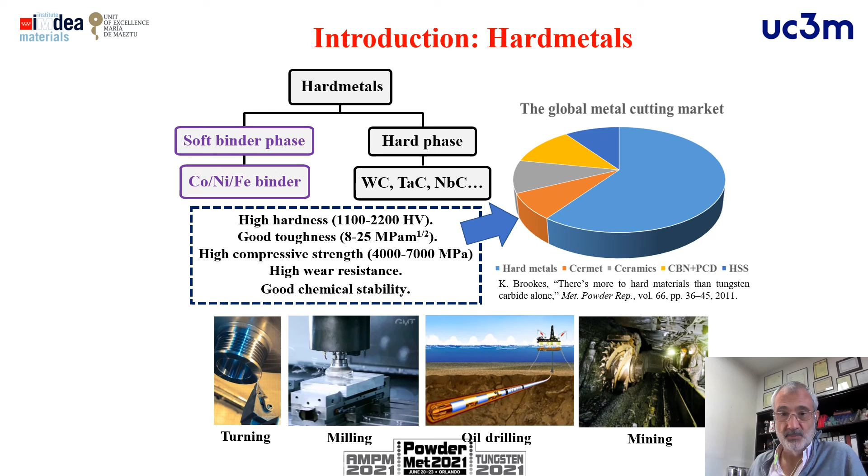This work is focused on the replacement of cobalt in conventional hard metals, cemented carbides, that usually use cobalt binder and tungsten carbide and other carbides as reinforcement. The market for these hard materials is really high, representing a high percentage of total consumption in the global metal cutting market.

Cobalt today is considered, since 2020, by the European Union as a critical material, both in terms of price and availability. This can be seen in a European Commission study that was published last year.

So it could be interesting to replace cobalt, but the problem is that cobalt is the best binder for cemented carbides due to its good combination with tungsten carbide during sintering.

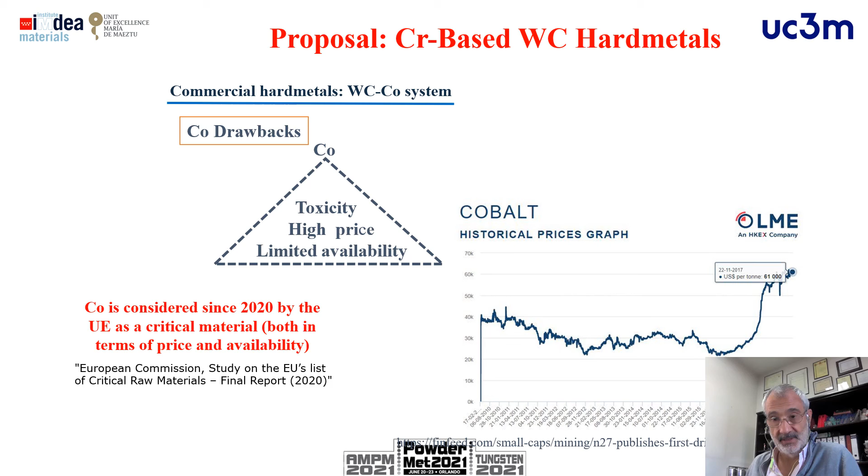So in our case, we want to design a novel tungsten carbide chromium-based metal without cobalt or nickel, which also has problems of toxicity and price. The idea is to replace conventional tungsten carbide cobalt hard metals in some specific applications, not of course in all applications.

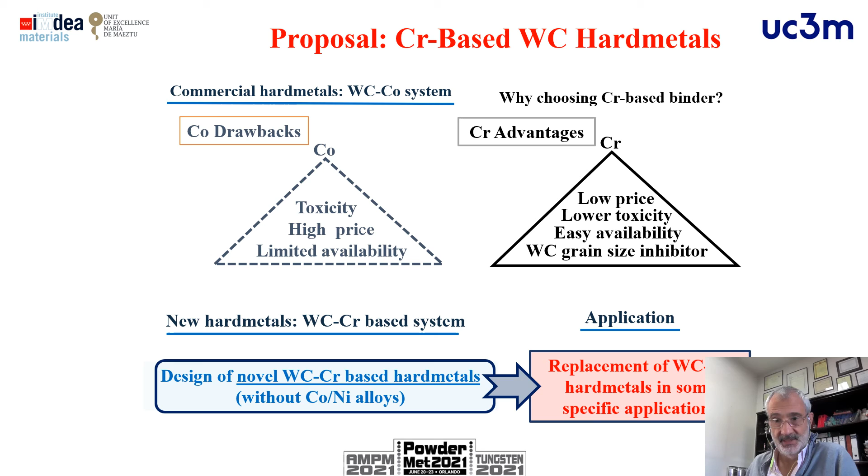The problem is that with temperature, the tungsten carbide grain size increases strongly. So we have to produce these nanostructured hard metals, which is a technological challenge, because the rapid growth of tungsten carbide grains with temperature prevents maintaining hard metals in the so-called nanosize hard metal group.

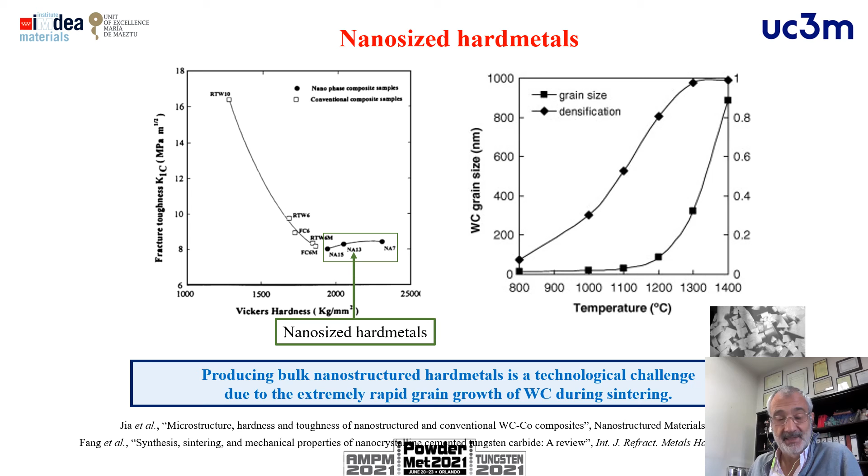For this reason, it could be interesting to use sintering techniques that avoid grain growth during sintering. So in our case, we want to design these nanostructured chromium-based hard metals with good performance and low cost, in which we replace cobalt with chromium or iron.

Chromium and iron have lower price, less toxicity, and are more available in the market, and could act as a tungsten carbide grain size inhibitor, which will contribute to not losing so much fracture toughness.

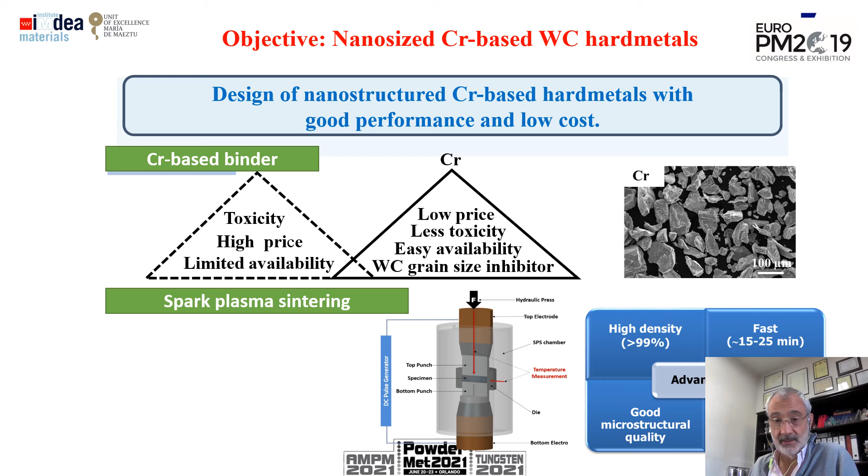In that sense, despite also testing materials with liquid phase sintering, we propose to use spark plasma sintering as a technology to consolidate these hard metals, because with this technology we can reach high levels of density in a very fast sinter cycle with good microstructural quality, stability, and good mechanical properties.

So the methodology is to design the composition using this chromium-iron binder, but through thermodynamical simulation we decided to introduce iron, because iron can reduce some negative effects and can improve the densification of these cemented carbides.

Also carbon is added in some specific amounts in order to reduce the formation of negative phases that can be produced during the sintering process. So this combination of iron and carbon will be in some way predicted by thermodynamical calculations and mathematical simulations.

Then we will develop the bulk materials by spark plasma sintering, and we will analyze the microstructure and the properties. In this case, we will see the hardness, the fracture toughness, and we have some results also regarding the wear resistance and the oxidation resistance of these new hard metals.

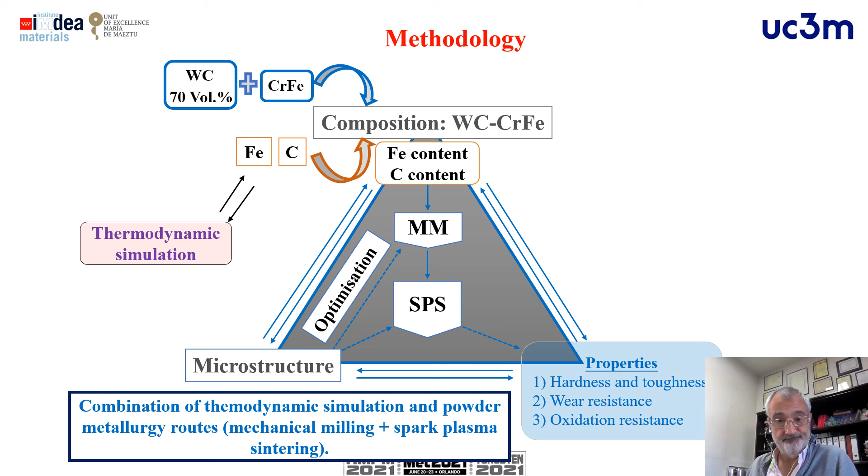The starting powders we used are two different families of powders, of cemented carbides of small size. Here you have the particle size distribution of this tungsten carbide, and we also used chromium iron powders, with a percentage of 71.4 chromium, iron as balance. In this case, this powder was supplied by Höganäs in Sweden.

The chromium iron powders are more irregular than the tungsten carbide, which is more spherical, and due to the small size of these particles, they tend to be agglomerated.

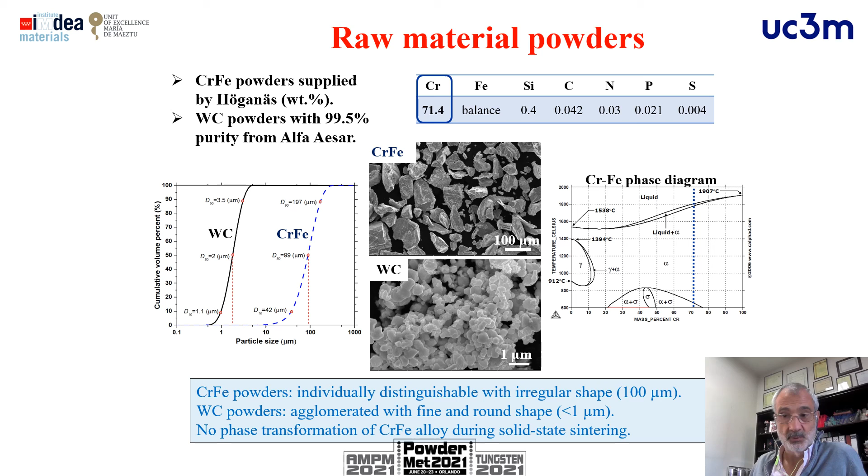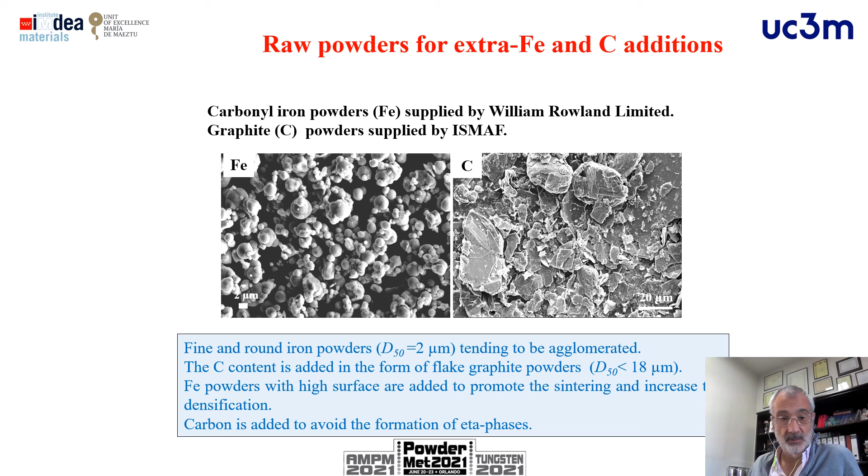As for carbon and extra iron powders, the iron powder we used is carbonyl iron powder, supplied by William Rowland Limited. This is a quite fine powder, very small size, and this will contribute to increasing the sintering behavior. The carbon is natural carbon, added in principle to avoid the formation of eta phases, and is also a conventional carbon used in conventional powder metallurgy.

So the first step is to integrate the carbon and the iron chromium binder with the tungsten carbide powders, and we did it by mechanical milling.

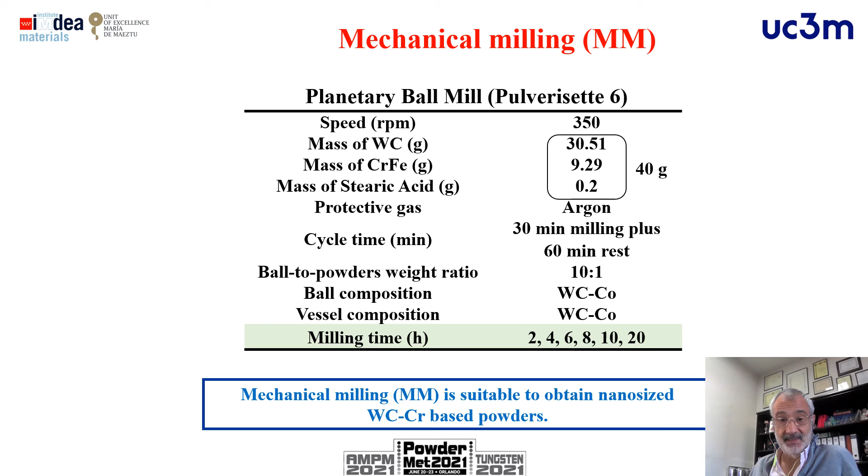In the next slide, we can see the evolution of the morphology of the powders through the milling time, and at the end we have selected the 20 hours milling time in order to have these rounded powders for the consolidation process.

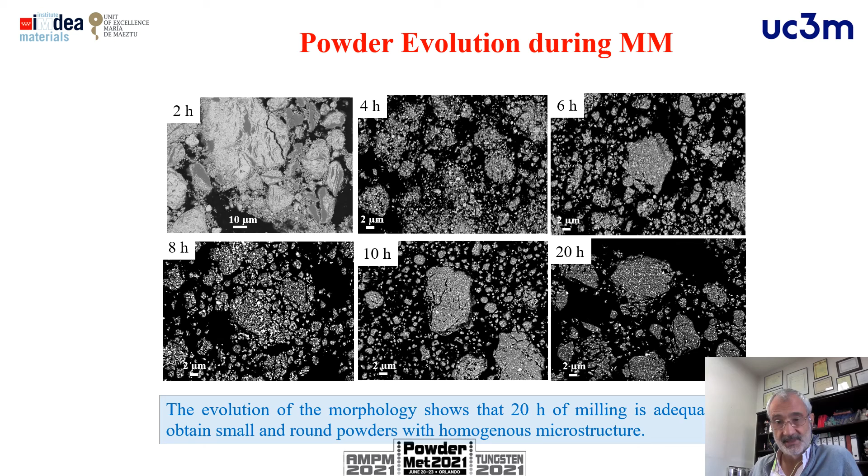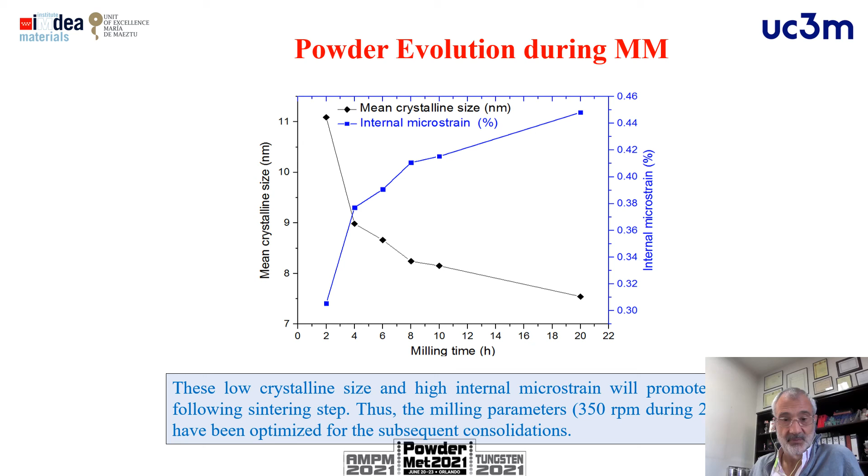So with the mechanical milling, we usually have this effect that we increase the internal microstrain and we reduce strongly the crystalline size. Reaching this small crystalline size, we can expect to have at the end this so-called nano size cemented carbides that we are looking for in order to not reduce too much the fracture toughness while increasing the hardness.

We have prepared some bulk materials through liquid phase sintering with these conditions. We heated it up till 1450 degrees for 30 minutes and furnace cooling in argon atmosphere. We selected this temperature because it's about 100 degrees above the eutectic temperature of the tungsten carbon chromium system.

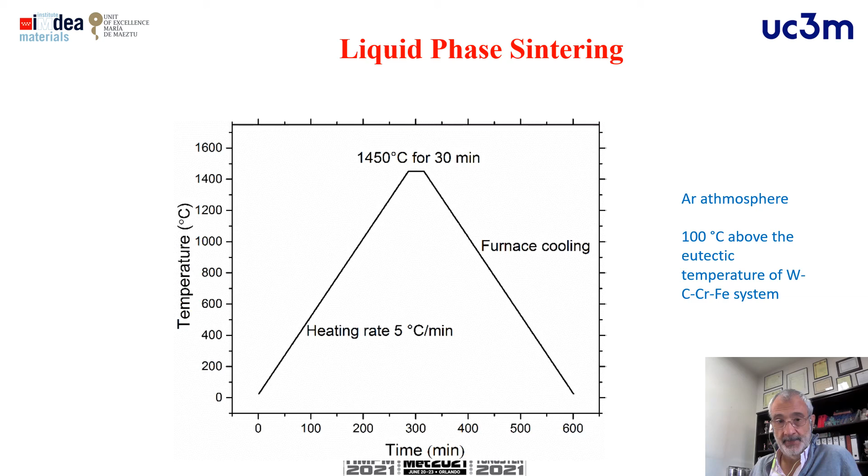These materials reach a relative density near to 96% in the case of some iron additions, but as I mentioned before, we have combined iron additions and carbon additions in order to increase the sinterability of these cemented carbides.

As you can see here, using in the order of 3% of iron and 0.5% of carbon, we can reach the lowest average tungsten carbide grain size in the final bulk material with good levels of relative density.

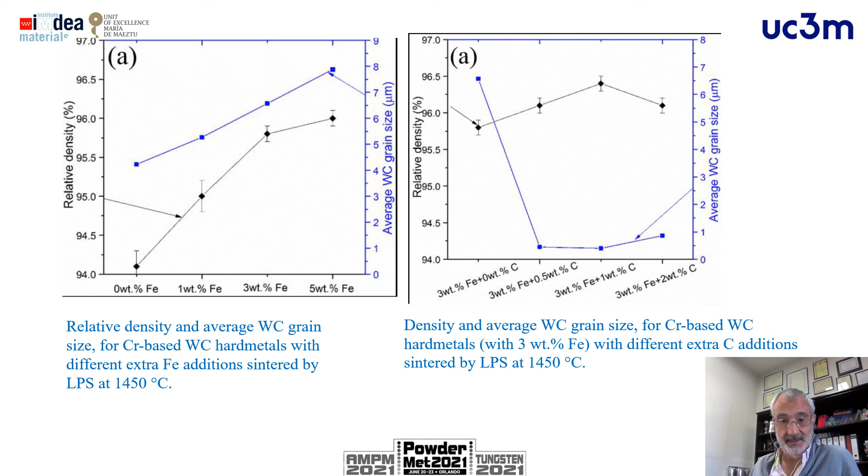Later we will analyze a little bit better the microstructure, but also the hardness that we can reach adding these amounts of iron in combination with some amounts of carbon.

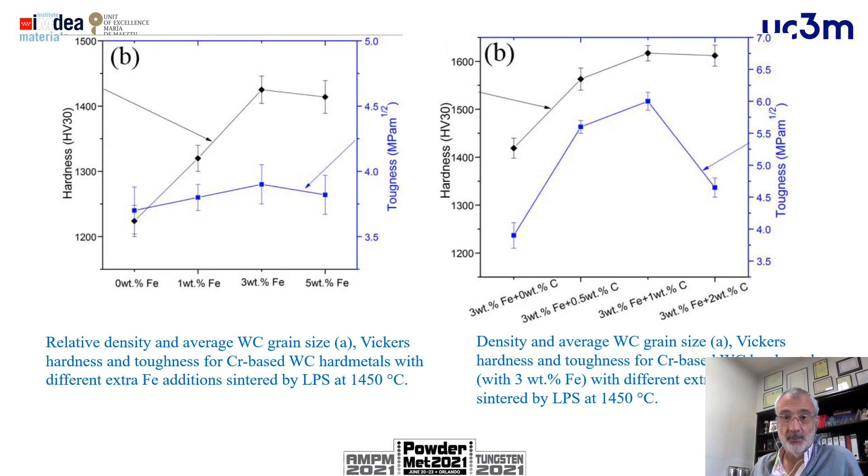You can see here with this combination of 3% of iron and 0.5% of carbon we can reach good levels of toughness, but not so high if we compare later with other materials obtained by spark plasma sintering. But the highest levels are with these amounts of carbon, also reaching good levels of hardness.

Here we can see the spark plasma sintering method. Here we have the typical force temperature time diagram, and with the field assisted sintering, we use much lower sintering temperature than the conventional sintering. So in principle, this will avoid the grain growth of the tungsten carbide.

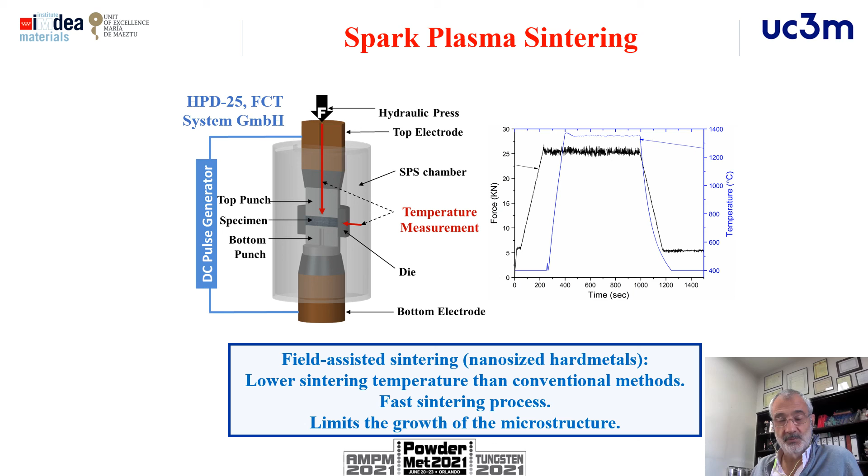It's a fast sintering process. We can, in this way, obtain a much better microstructure, looking for a good final fracture toughness combined with good hardness. We have tested many spark plasma sintering conditions.

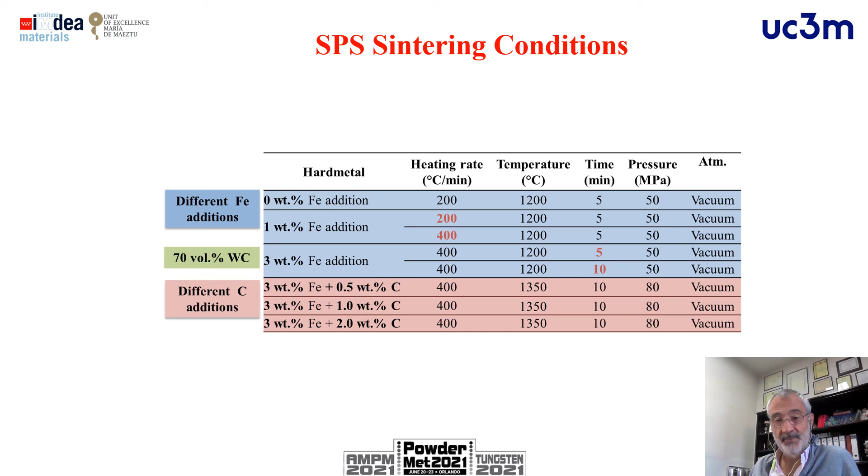As you see here, we have changed the heating rates. We can even test different temperatures, 1200 or 1350 centigrade degrees, and different times and different pressures.

At the end, we have selected for our best combination of material the 3% of iron with 0.5, 1 or 2% of carbon, the highest temperature, the heating rate of 400 degrees per minute, for a holding time of 10 minutes and a pressure of 80 megapascals.

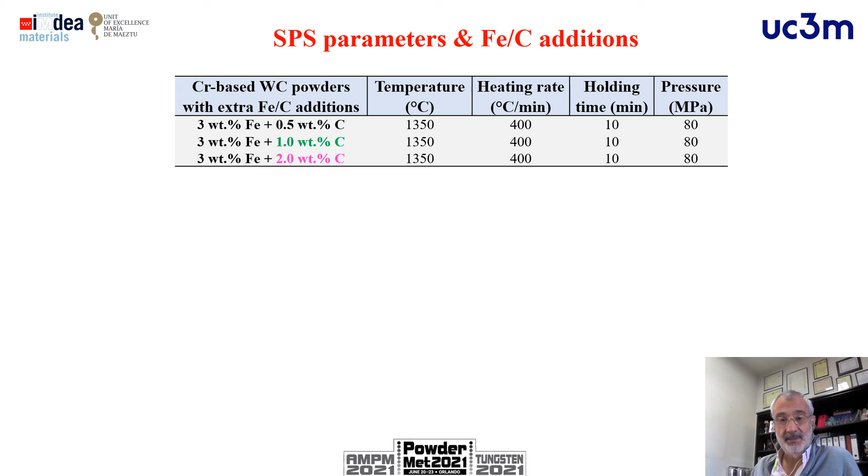This holding time with this high heating rate allows us to get a good densification. As you see here, the best densification was obtained with the value of 3% of iron and 0.5% of carbon.

This is the graph with the black line here. The pink one is regarding the 2% of carbon, and this one is regarding the 1% of carbon. So the best combination of elements, iron and carbon, is 3% of iron, 0.5% of carbon, reaching the highest level of density.

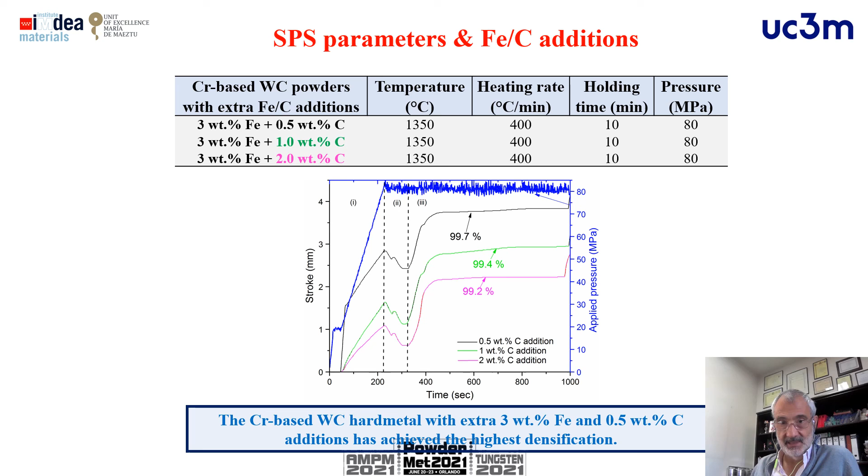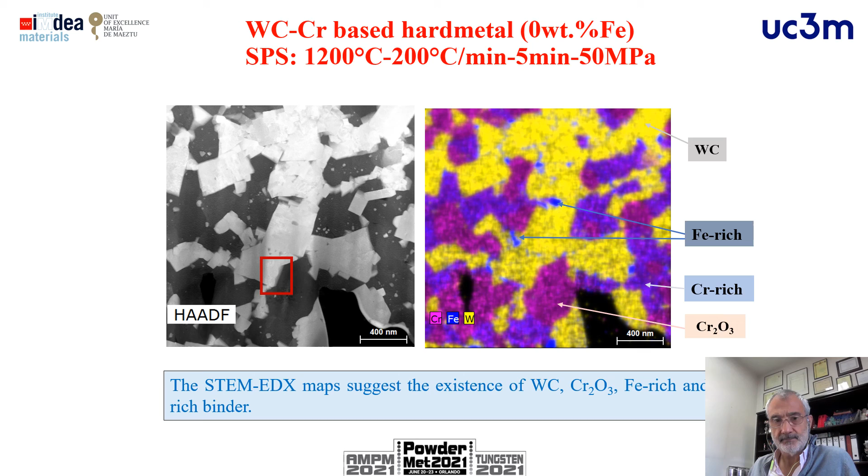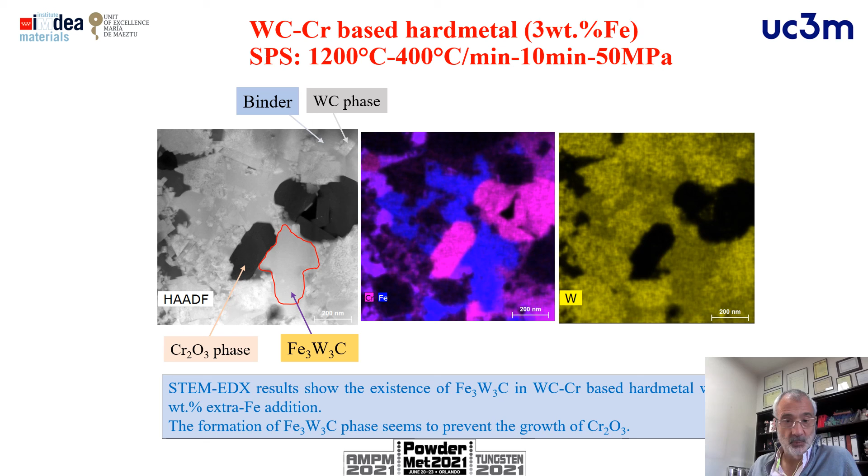So if we introduce iron, we have the presence not only of the chromium oxide, but also the formation of this iron tungsten carbide that in some way is better than the eta phase, because this carbide prevents the growing of the chromium oxide and allows reaching good levels of toughness.

So it could be a good idea to try to combine the carbon with these high levels of iron. So we have selected 3% of iron, and we mix with this 3% of iron different contents of carbon that we will analyze later.

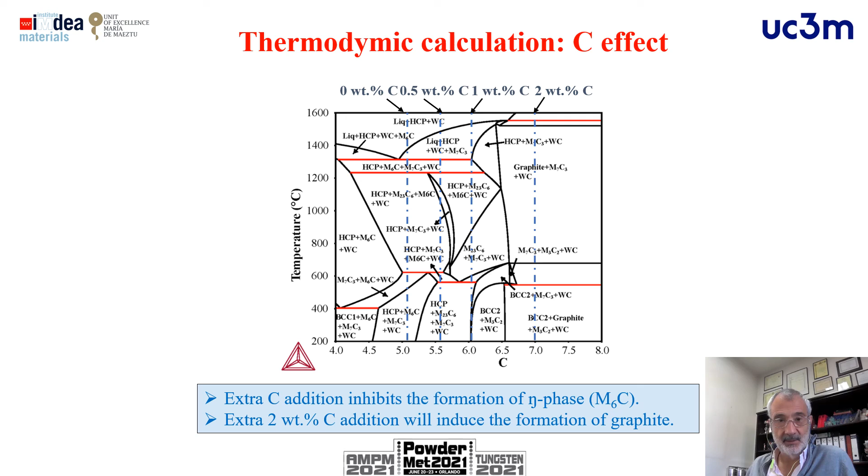Previously, we tried to see what happens in terms of possible carbide formation with addition of carbon to the tungsten carbide. We tested different amounts of carbon between 0.5% and 2%, but the highest levels of carbon addition can produce graphite formation, which is not a good idea for the final properties. So we will see that the best combinations are near 0.5% carbon additions.

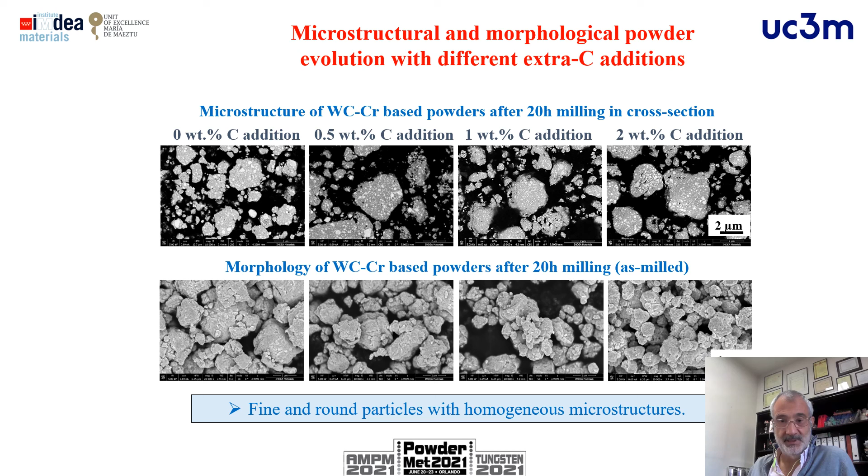Here we have the evolution of the mechanical milling. At the end, after 20 hours of milling, we got these rounded particles.

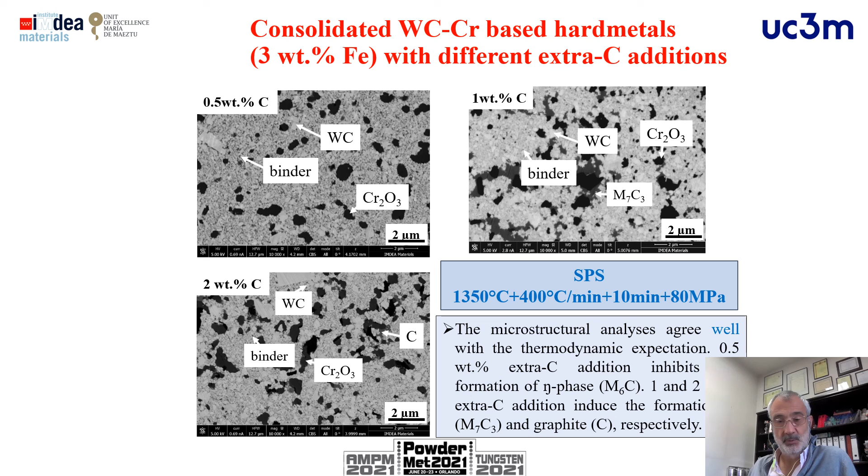The microstructure with different carbon additions also presents some levels of chromium oxide, but as we increase the amount of carbon, we can also get carbides which are not desired due to the brittleness they introduce. Here we have more detail on what happens in the microstructure with extra carbon over 1% or 2%, with these new carbides that can form.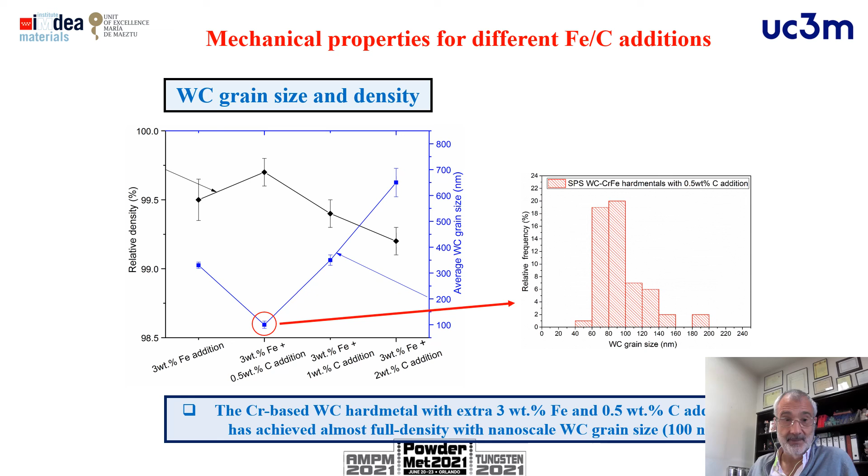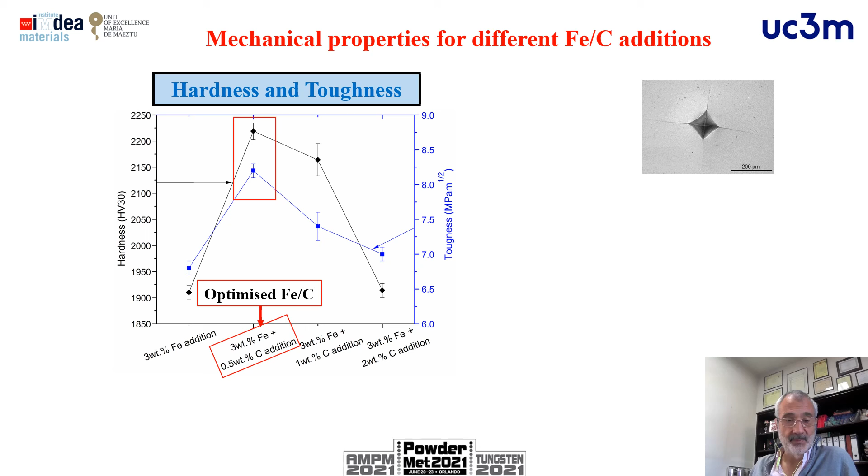If we analyze the properties by the indentation method, the fracture toughness of this material can reach levels of 8 or 8.5 megapascals square root meter, with relatively high hardness over 2200 Vickers. These values for the optimized material can be plotted in this graph.

We can correlate fracture toughness with hardness, and we are at this point where we can compare our result with some conventional tungsten carbide cobalt, conventional hard metals.

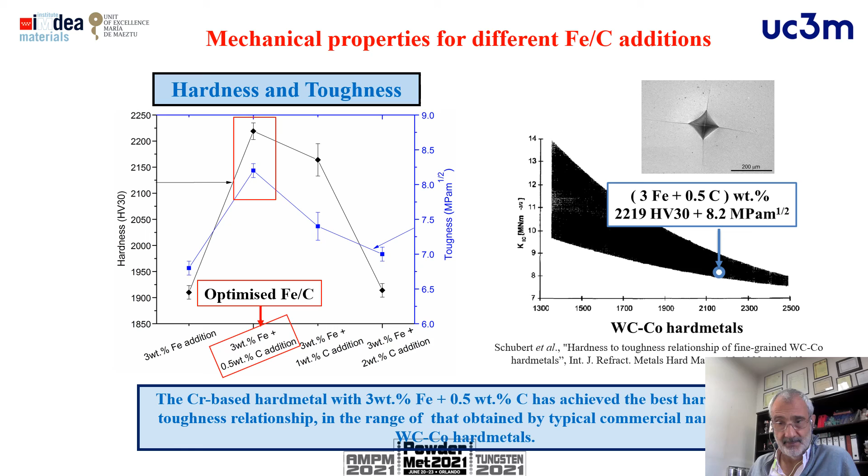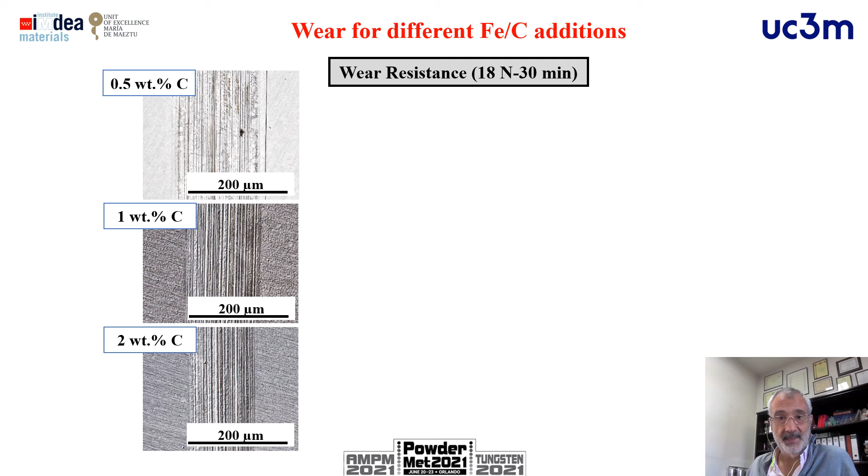We have also developed wear resistance tests, done in a Bruker tribometer with a dry sliding test using a ball-on-plate system. We used alumina balls, and here you can see the profiles of the wear tracks in the material.

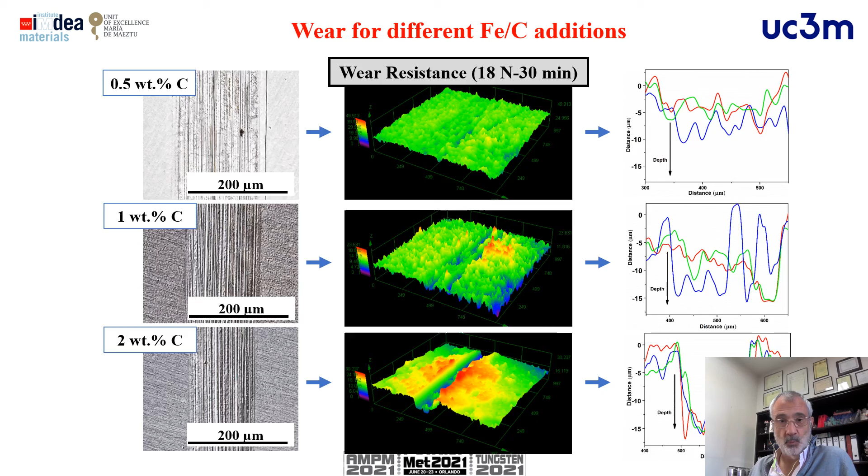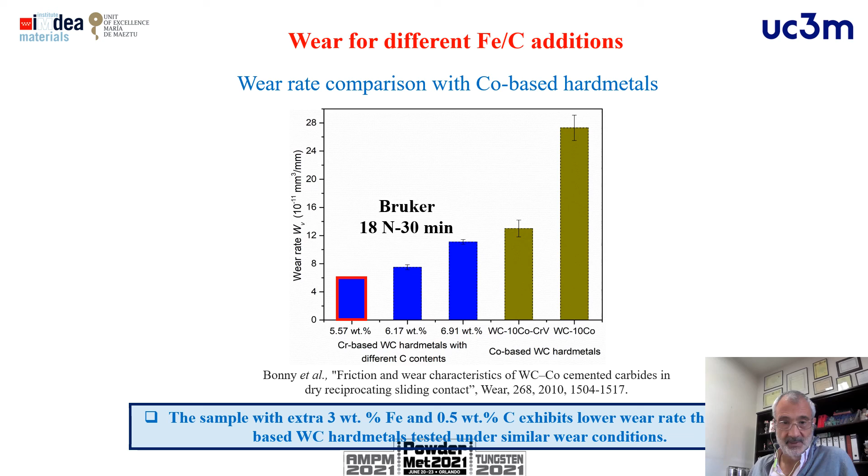If we measure the wear loss, the wear rate, in comparison with conventional cobalt-based hard metals, shown here on the right in green, we have our results on the left. The material we selected as the best one, with 0.5% carbon and 3% iron, got the best results in terms of wear rate, the minimum wear rate compared with all other materials.

We also tested mass gain in terms of oxidation, comparing our material, shown at the bottom of the graph. The red line is the material with 0.5% carbon and 3% iron. In pink and green we have some conventional cemented carbides.

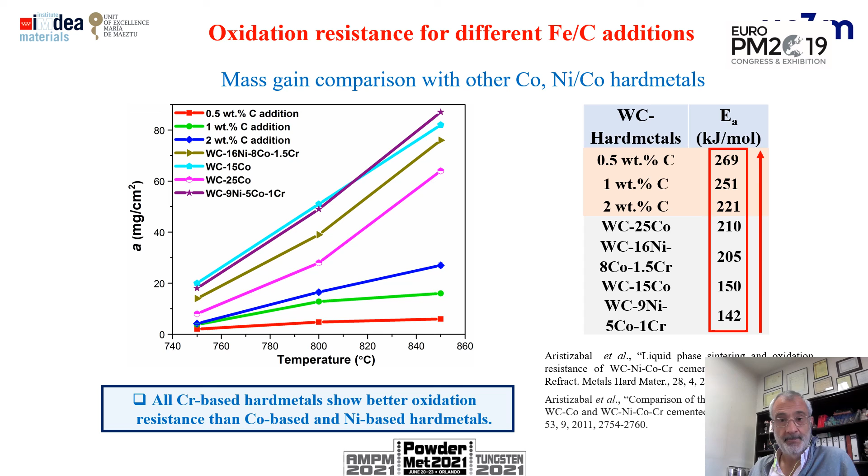We have seen that the mass gain growth compared with our materials is much higher in the other conventional cemented carbides. That means we are getting a good combination of oxidation resistance and wear resistance for this material. This is a comparison among all of them.

As a conclusion of this work, trying to be on time: spark plasma sintering is a suitable technique to consolidate these novel tungsten carbide chromium-based hard materials with very fine microstructures and good mechanical properties. The addition of iron and carbon improves the toughness-hardness relationship in these hard metals. If we add only iron, it can induce the formation of eta phase, which is brittle and must be avoided, but the addition of carbon can reduce the amount of eta phase and allow us to achieve a good combination of properties.

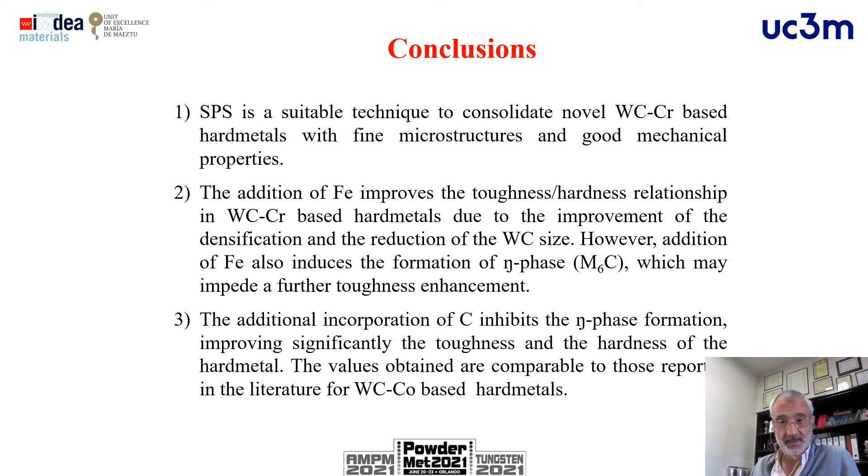So the viability of processing these novel chromium-based tungsten carbide hard metals by mechanical milling and spark plasma sintering, with optimal hardness and toughness relationship and good oxidation and wear resistance, has been demonstrated by this research work.

This good combination of oxidation resistance and wear resistance values might lead to the future replacement of cobalt-based tungsten carbide hard metals. So those applications are promising, and I think we're opening a new way to develop new families of materials, avoiding the use of cobalt.